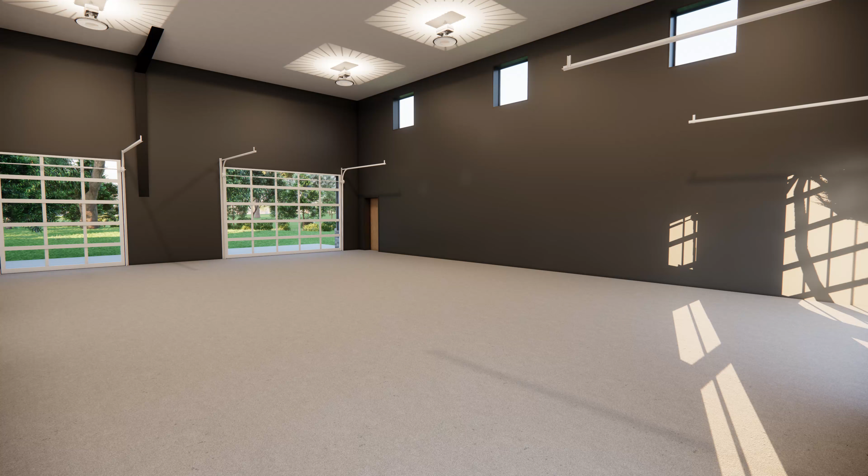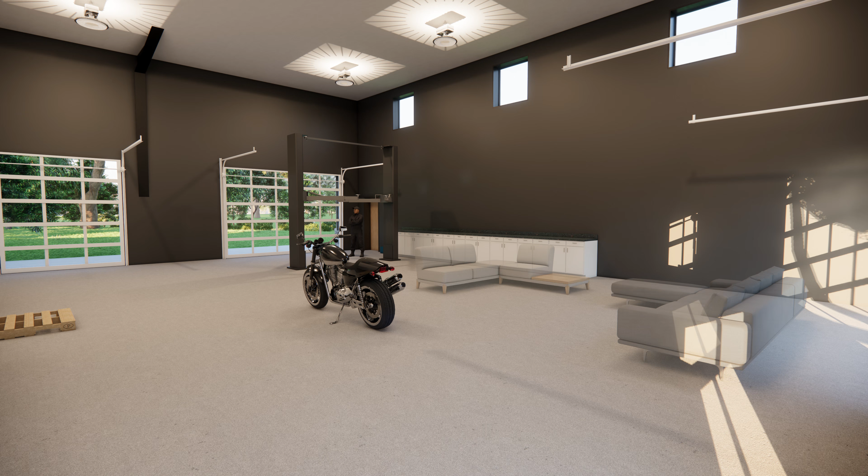Most barndominiums start with a pretty simple idea: a large open space with a shop area and somewhere inside that's like a place to live. But a lot of them end up feeling exactly like that—they feel like a shop with just a couch placed inside it.

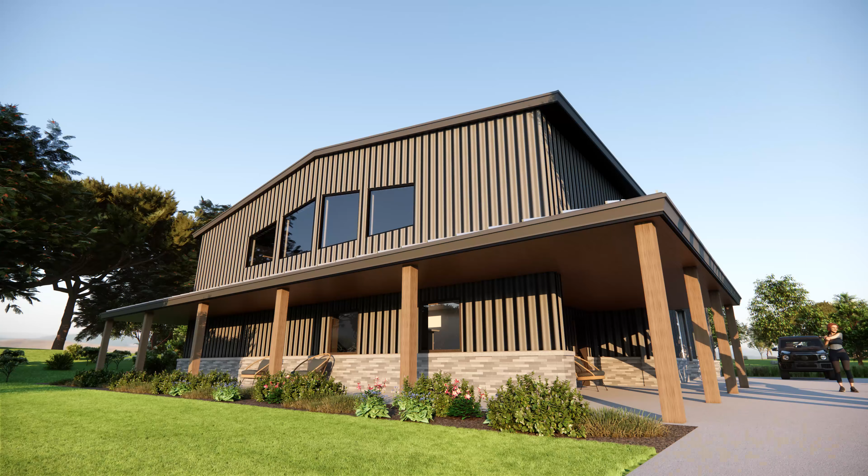So I want to take a step back and try something a little different: design one from scratch, looking at it from a residential and commercial side. Not something that just looks good in a rendering, but something that actually works when you're living in it.

For me, this wasn't about just making it bigger or more dramatic. I wanted to get the few key decisions right—the kind you don't always notice immediately, but you end up feeling every day when you're living in this space.

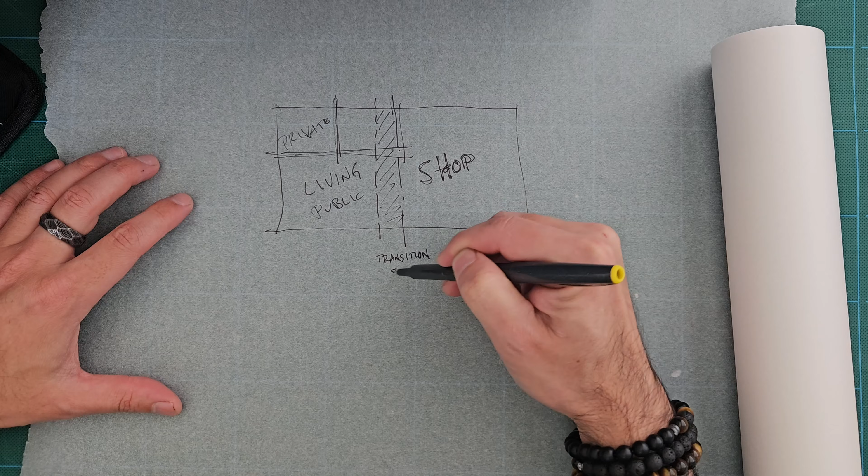I started this pretty simply by laying out the main zones. There's the shop, the dirty, loud side. There's the living space, where you might have friends over, cooking breakfast, hanging out with your family. And then there's the private areas, a place for solitude and rest.

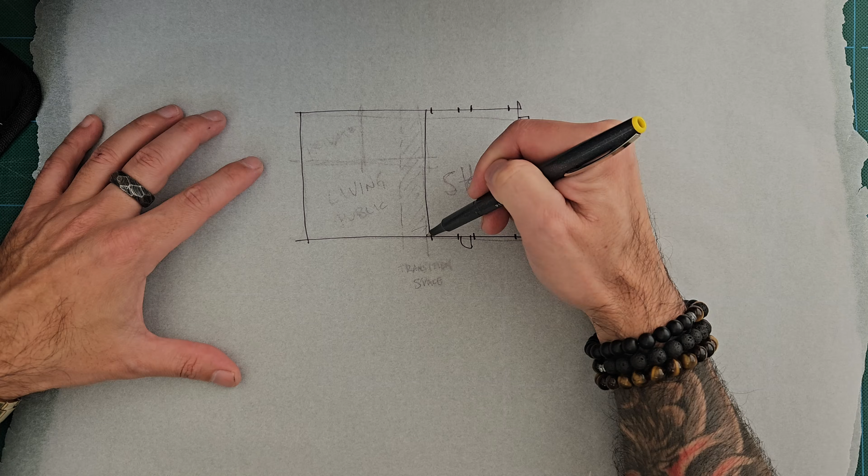Each one of these has a different purpose, a different noise level, and a different pace to your life. At this stage, I'm not trying to solve the entire plan—I'm just trying to understand how these pieces might relate to each other, because a lot of the real decisions don't show up here. They show up once you start moving through the space.

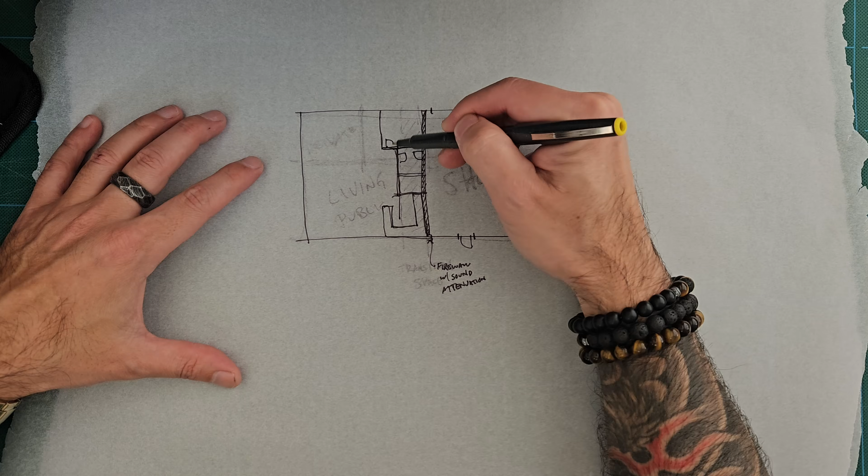But the one thing I did want to establish early on was a transition between the shop and the home. Instead of going directly from one to the other, I introduced a small in-between space—somewhere you can drop your gear, take your boots off, and reset before stepping inside. It's a simple move, but I think it sets the tone for everything else.

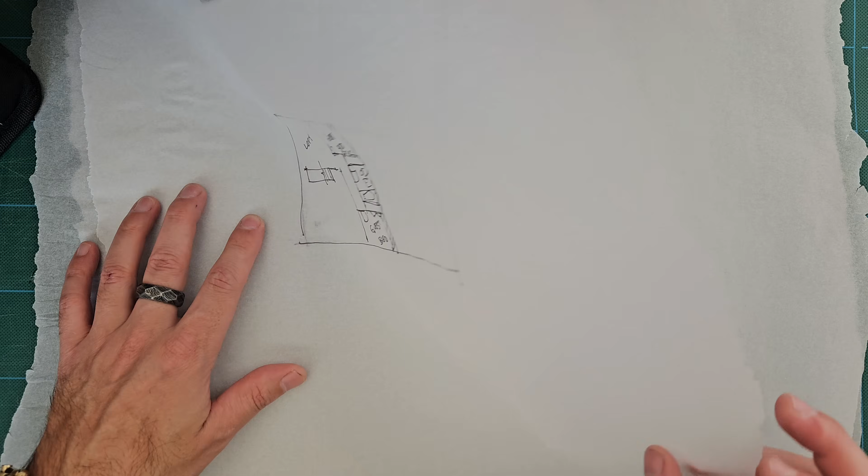So when I start modeling something like this, I try to keep it very simple at first. I begin with the structure, the main walls, and the primary openings—just enough to define the overall space without overthinking it.

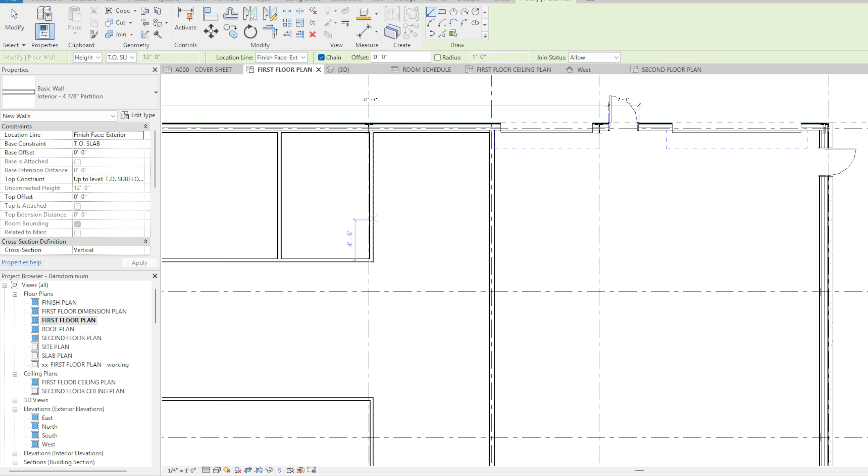From there, I start working on interior walls and lay out the floor plan pretty quickly. I'm not trying to perfect it, I'm just trying to get everything in place so I can start moving through the model and really experiencing the space as you would live there. Because once you're inside the model, you start to notice things you can't see on the plan.

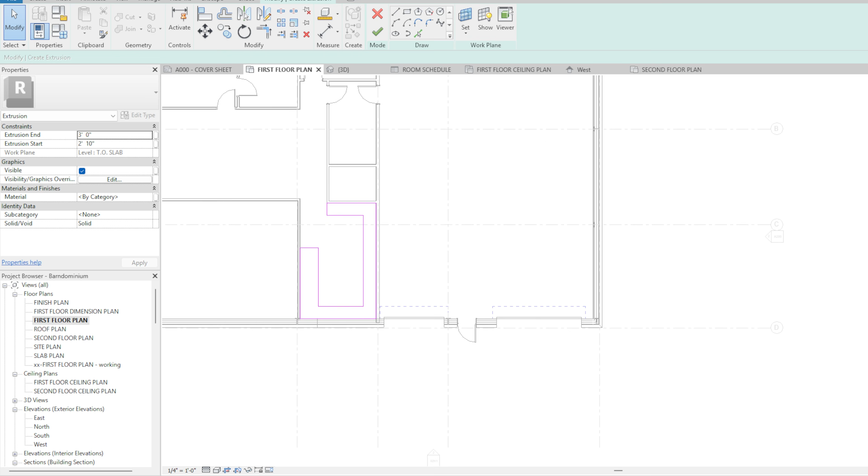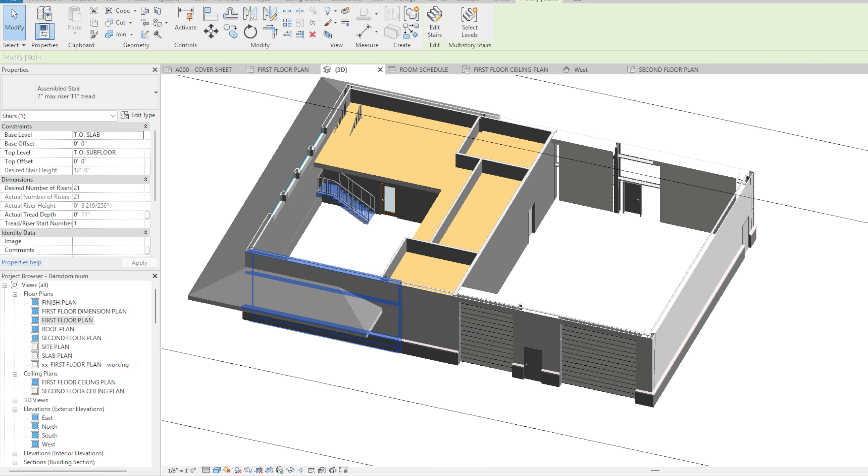The area I ended up spending most time on early was the stair and how it connects to the second floor. You have a loft space above, open to the living area below, and these two are really tied together. The stair isn't just about getting upstairs—it's about how the two levels relate to each other.

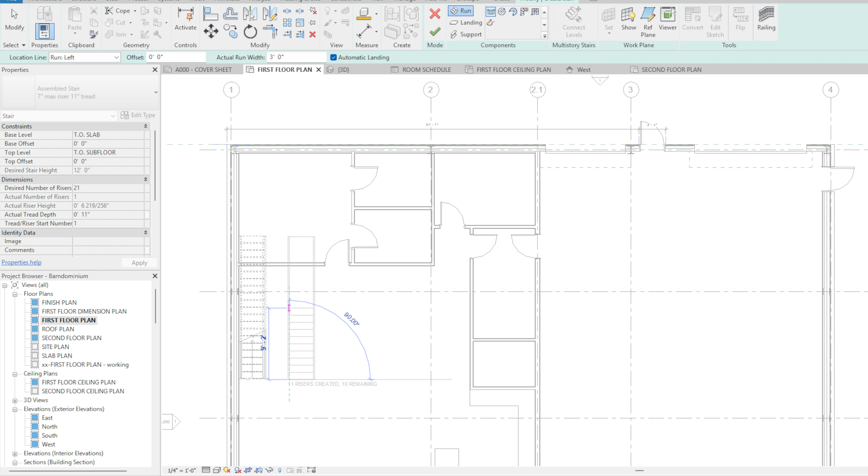I tried different configurations here—straight shot, L shape, different turns, different landing conditions—trying to find something that felt natural in the space. Some options felt too abrupt. Others felt like they were just placed there without intention.

I eventually landed on this L-shaped stair. It gives you a natural place to land, a moment to turn, and connects both levels in a way that feels more considered. It's one of those elements that really shapes the entire experience.

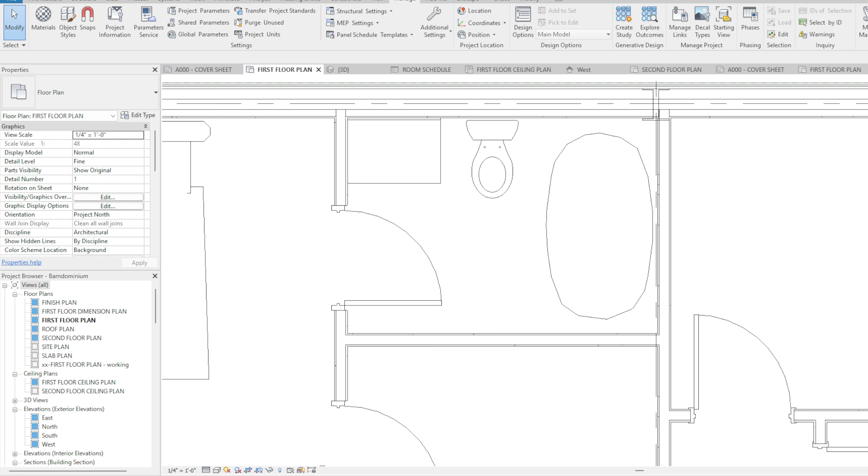Once those elements are in place, I start adding furniture to the model. Nothing super detailed or perfectly laid out, just enough to understand the scale of what I'm working with and how the space might actually be used if you lived in it day to day. And that's where things started to reveal themselves.

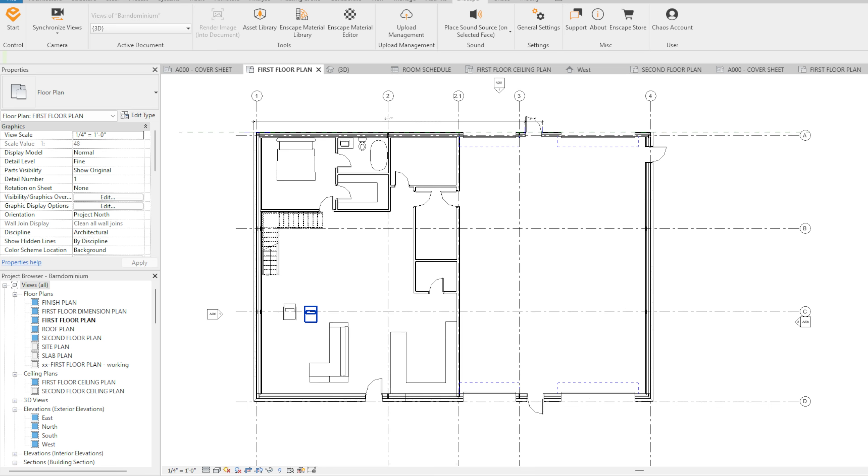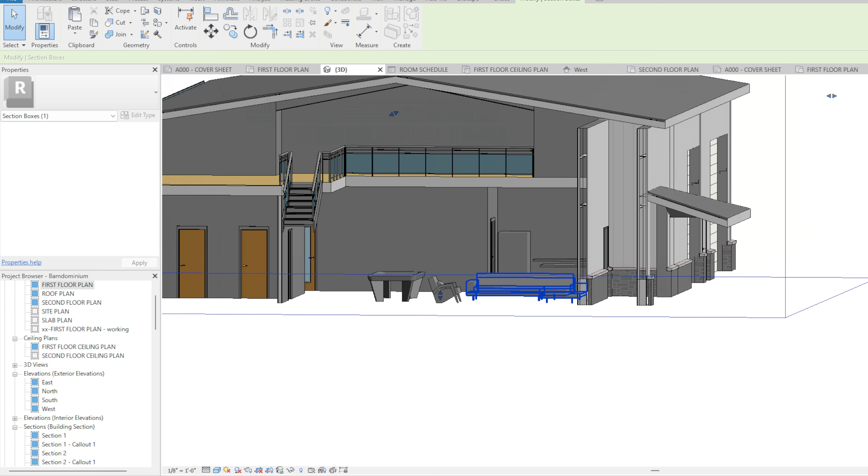The first thing that stood out to me was this entry. On the plan, it seemed completely fine. But once I was moving through the space with the furniture in there, it felt too direct and too abrupt—like you arrived at the building and the door was right there, immediately in the living area.

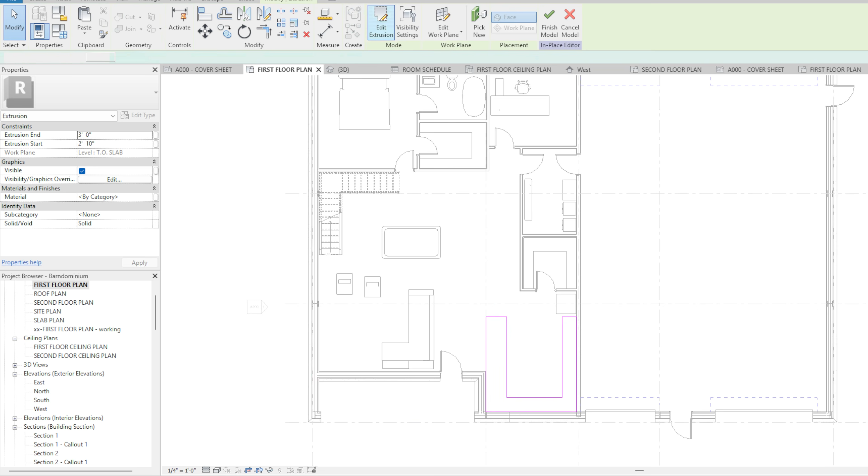There was no transition, no sense of arrival or change of pace. So here I pulled the wall back slightly, just enough to create a recessed entry—almost like a small porch at the front. That small adjustment completely changed the feeling. Now there's a moment when you arrive, before you're fully inside the home. It's subtle, but it makes the space more intentional, and it makes it easier to transition from the outside to the inside.

The next thing that became obvious to me once I was in the plan was the way the bedrooms connected to the main space. Originally, the bedroom doors actually opened directly onto the living area, and once I saw it in the model, it just felt too exposed. It's one of my pet peeves, having your bedroom door open right into the living area where other people are. There really wasn't enough separation between the public and the private.

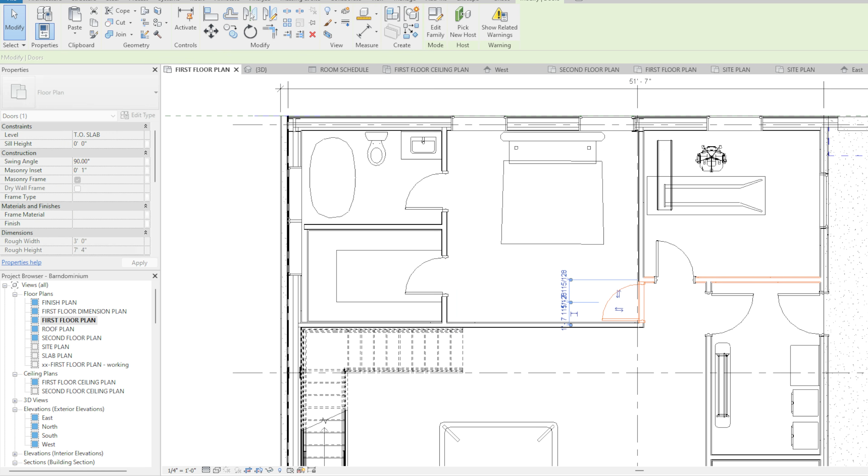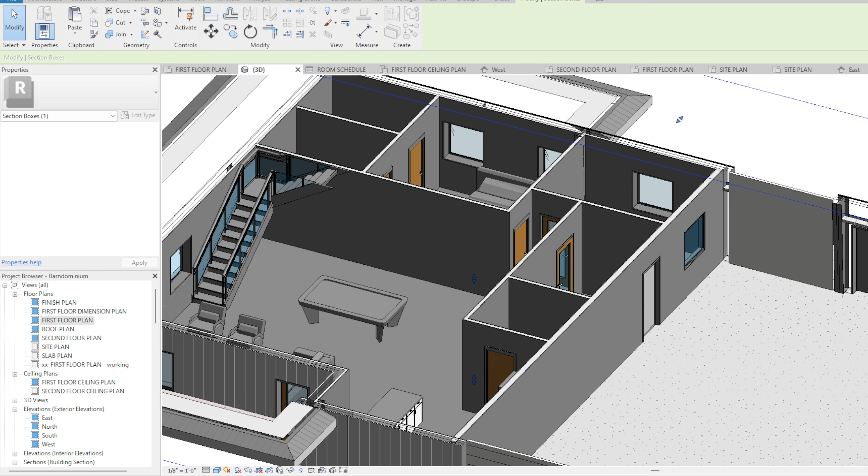So instead of moving it around and just trying to adjust it slightly, I just flipped the layout of the bedroom with the closet and the bathroom completely. That gave me just enough room to create a small alcove where the bedroom entry is, alongside the office. Now there's a layer of privacy without needing to add more space or square footage. It's one of those decisions you might not notice right away, but you'll feel it over time when you're feeling more secure and more private.

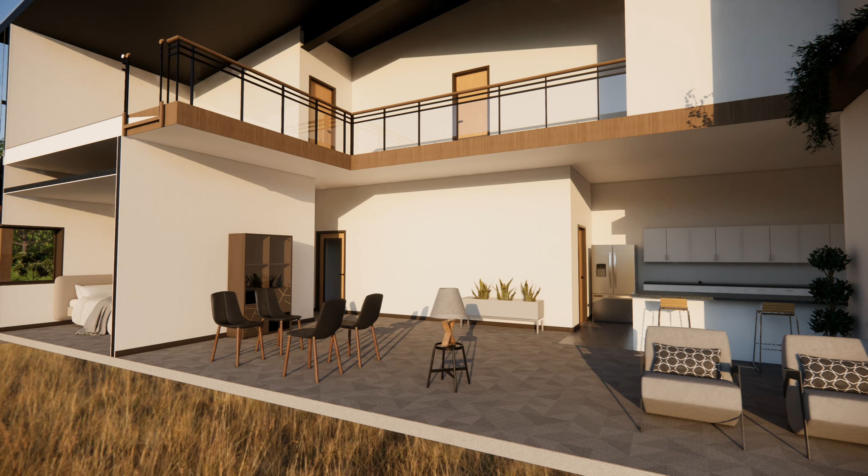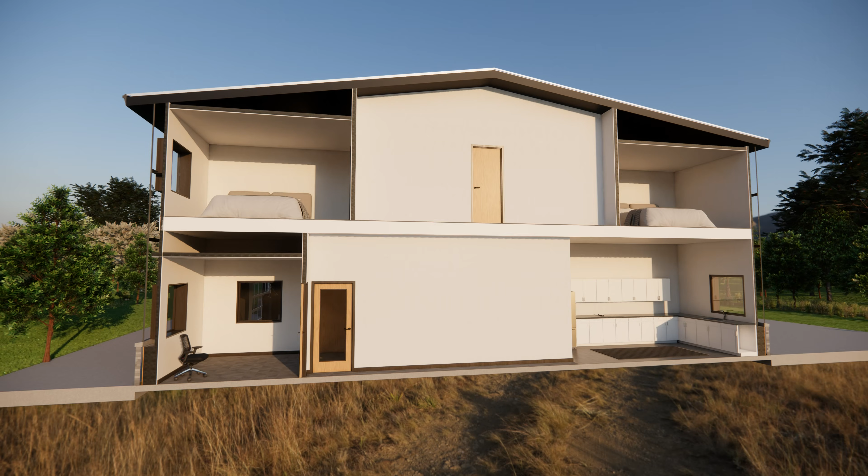From there, I start thinking about how we shape the experience of the space, mostly volumetrically and vertically. It's easy to make everything tall, but when everything's big, nothing really stands out. So instead, I try to create contrast. The entry is slightly more compressed, the main living space opens up with more light and more volume, but in that back private area, it comes back down again with a lower ceiling to feel more controlled and comfortable. It's not really about the size, it's about how you move from one space to the other and how you get a different sense of feeling, whether you're in the main living area, the bedrooms, or in the shop area.

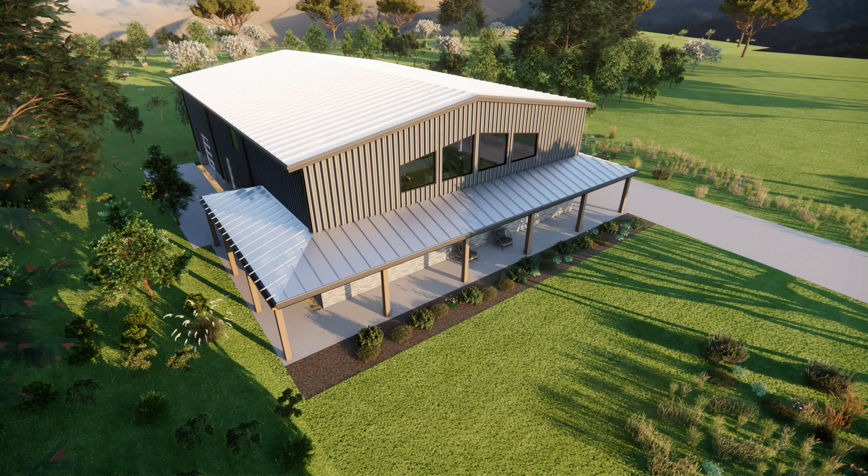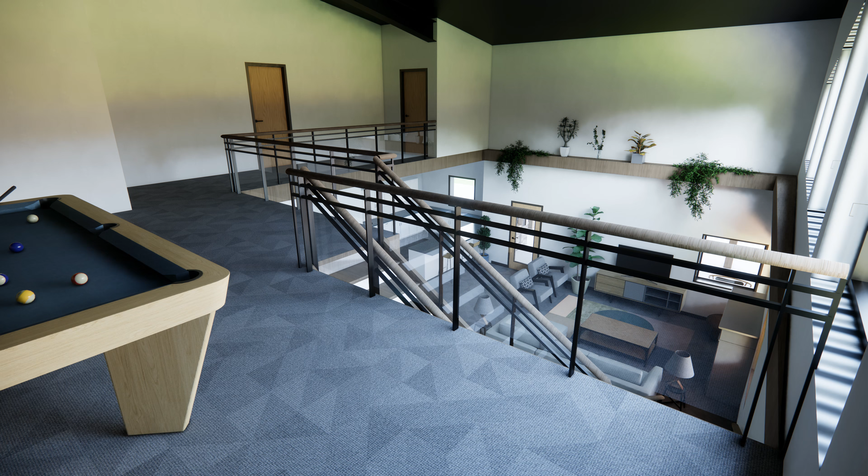Material-wise, this is always going to be a balance with these types of buildings. The exterior is going to lean more industrial, but the interior should still feel like a home. So I focused on that contrast: simple, durable materials on the outside and in the shop, but warmer, softer materials on the inside. And then the light was going to tie everything together. Not just how much light there is, but where it comes from. Light should help define how a space is used before anything else.

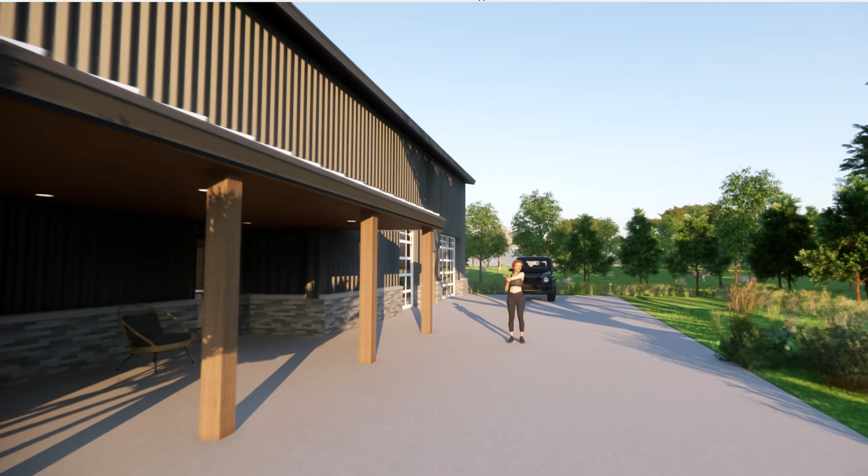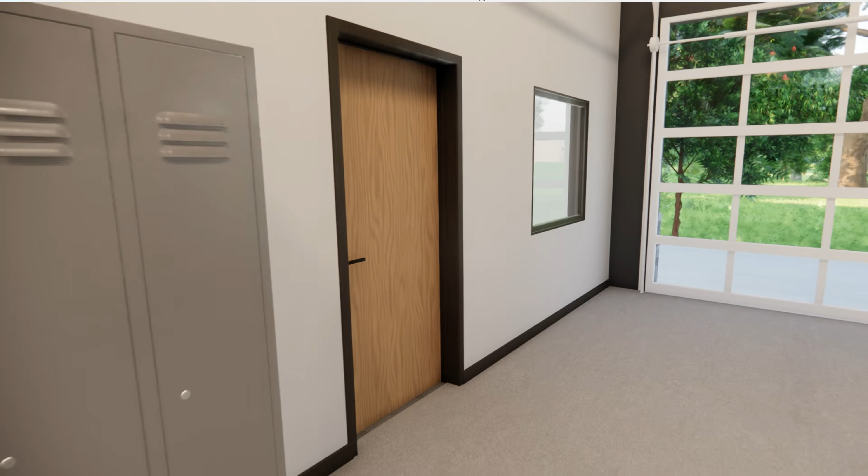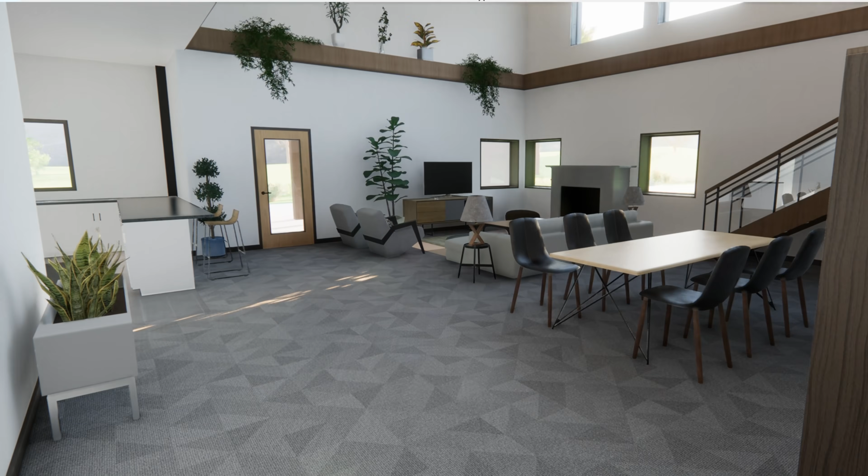So imagine it's a Friday, you pull into the shop, it's been a long day, and you're excited for the projects you're going to be working on. There's space for you to work, or to build, or just to move freely. From there, you transition into that in-between zone. You drop your tools and your keys, you take your boots off, and you take a moment to breathe. And then you move into the living space. It's a bit quieter, it's warmer, and it has a different pace to it than the shop. This becomes the center of the home.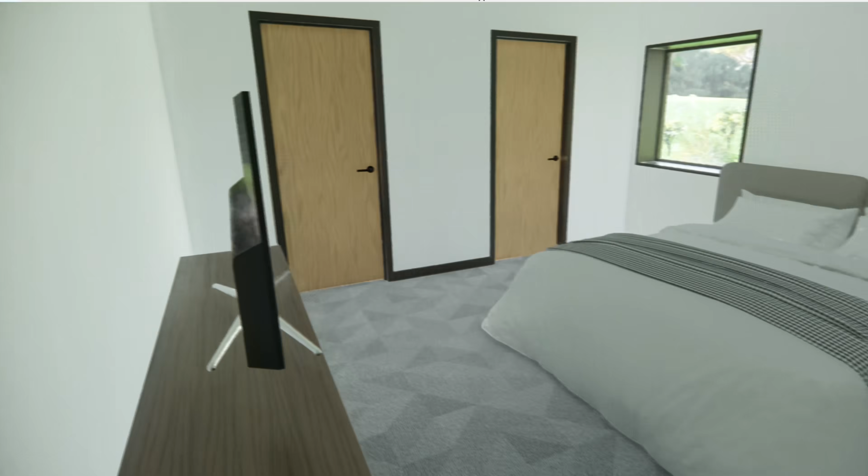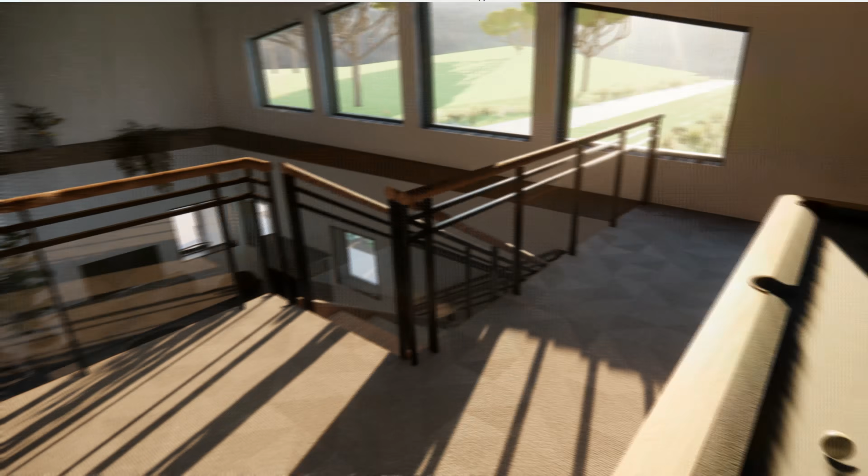Beyond that, you've got your office and your bedrooms, where it's much more quiet and calm. It's more still, more contained, a little more personal. A lot of these decisions are kind of small, moving a wall or flipping a layout or refining a stair. But once you start moving through the space, you can feel which ones really matter. And that's really what the design process is about, not just designing something that looks right, but something that feels right when you're living in it.

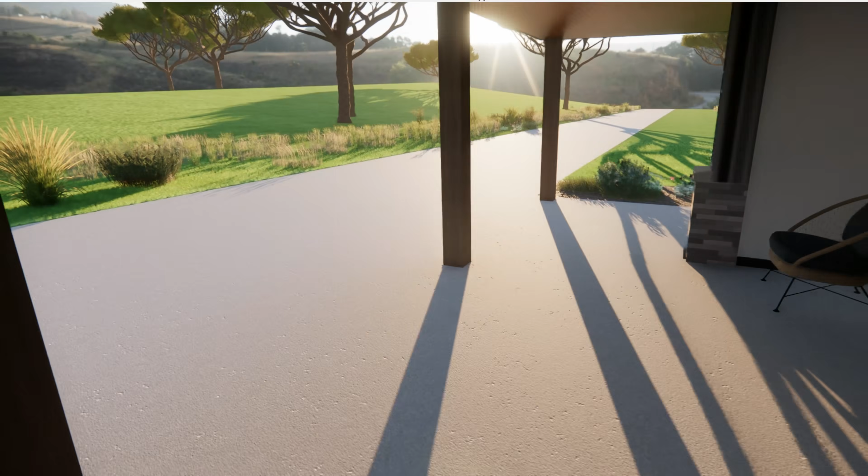But I want to know from you. I've never lived in a barndominium before. I've done residential, I've done commercial work, and this is sort of the marriage between the two. But if you're thinking about a barndominium or you currently live in one, what works for you? Let me know, because I'm really trying to learn more as I design these buildings, and I'd love your feedback. Thanks for coming along with me on this. Stay curious and design with intent.